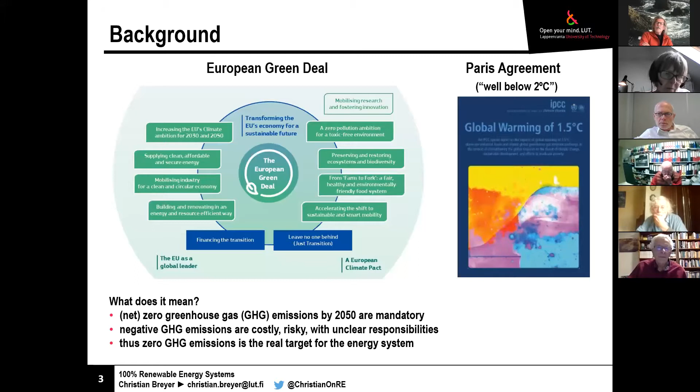So in the end, what we know is that even negative emissions will be required, but it's very blurry what it all means. And so the real first target is zero greenhouse gas emissions, and how this is achieved best is the question. You will not be surprised when I talk on 100% renewables that I rate this option very, very high. First of all, what is really important is we have a really fundamental rationale for electrification all around, and this means efficiency. Let's start with electricity, the first column.

If we have a thermal plant, whether it's fossil or nuclear, it doesn't matter. Around 40% efficiency is what we can expect from primary fuels in, electricity out. It can be less. We know nuclear is less. We know old coal is less. Most modern gas turbines are a bit higher, but anyway, there are huge losses. If we talk on renewable electricity from photovoltaics, wind turbines, or hydropower, then primary energy is electricity. So the electricity generated is primary energy. And then it's already on electrons, which typically is at very high efficiency.

Heat is something similar. If we have really good heating systems, we get close to 100%, maybe 80 to 90% is not a bad expectation value. But then compared to electricity-based heat pumps, where we can have a coefficient of performance of 3, 4, even higher would be possible. So that means we have again roughly a factor of 3 higher efficiency. The same is true for the transport sector.

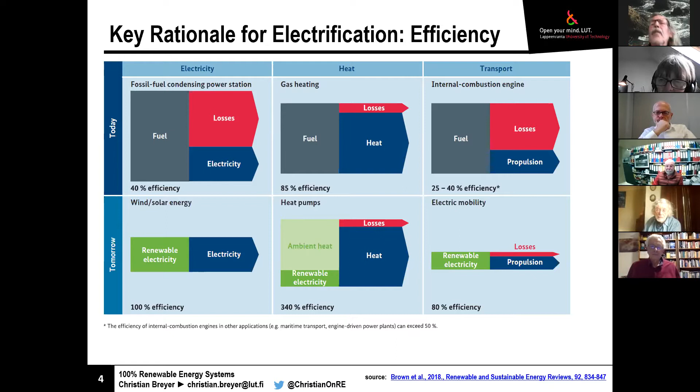So to my students, I always say our cars, at least in the recent past, are heating systems on wheels, because the efficiency for a car is around 20% over the entire value chain. So from an engineering point of view, a huge disappointment. In the best possible cases, maybe ships or airplanes, we're around 40%. But going back to cars, comparing that to battery electric vehicles, we will be at 70, 80%. So again, a factor of 3 in between. So to sum this up, electrification is the key means to get the entire energy system much more efficient. So now let's talk a bit more on Europe.

For the case of the UK, it might be more the other way around, more wind, but it really depends on the system constraints, whether we regard the UK more as an island or more as a basis for high national income from exporting energy. So valuable wind electricity exported to Europe, which could generate nice income for decades, then the wind share would be higher. If it's more for domestic supply, then the solar share would be a bit higher. But this is just a side comment here.

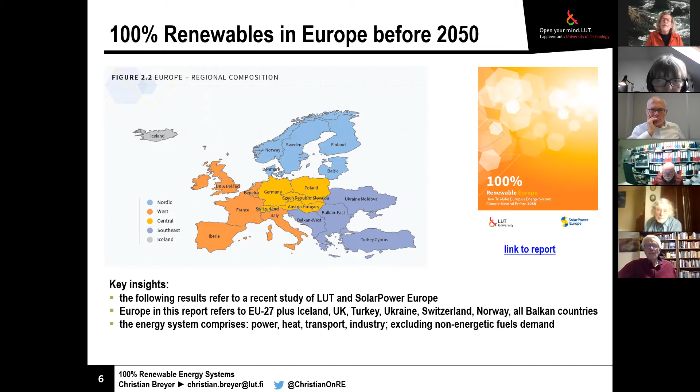When I talk about Europe, I mean this structure of Europe. So Turkey is part of Europe, Belarus you don't see here, that's then part of Eurasia, but Ukraine is Europe. The decision was simply which countries are more integrated to the European side or more to the Russian Eurasian side, and due to that you find this European structure, but that should not be that surprising.

I will take most of the fundamental storyline I would like to tell on a 100% renewable system from that report, because it's one of the highest standards we ever did. And this is now the basis for all research we do there. Three scenarios: one is called laggard, then moderate, then a true leadership scenario. 100% renewables is both for the moderate and the leadership. The laggard is more what was published so far from the European Commission, but then expanded for entire Europe.

And what does it mean for the Paris Agreement, greenhouse gas emissions, fossil fuels, nuclear? In the real leadership scenario the fossils are phased out by 2040, nuclear is phased out by 2040, all renewable, zero emissions. Moderate is a kind of societal compromise somewhere in between. When it comes to nuclear, there is a phase out, but the acknowledgement that existing plants run to the end of their technical life, but new ones would not be built. So this is the assumption there.

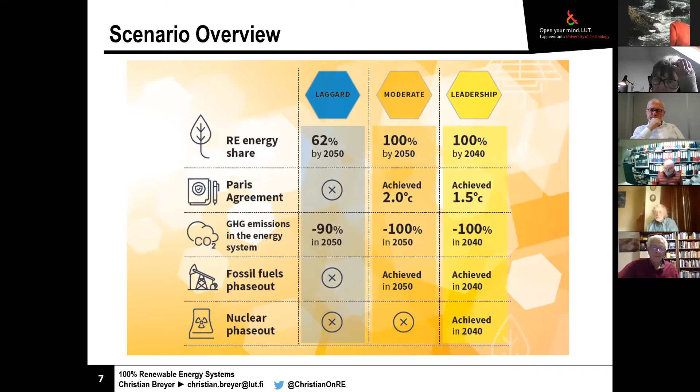When it comes to the energy system, sorry for this crowded diagram, but you see the tip of the iceberg of the complexity. All in all, we have 120 technologies there, for various sectors: power, heat, transport, industry, storage, power grid, and what we call power-to-X technologies, where electricity is converted to something else, like heat or fuels. A few of them are depicted. Of course also the conventional energy system from fossil, nuclear, bio and waste. So everything is there.

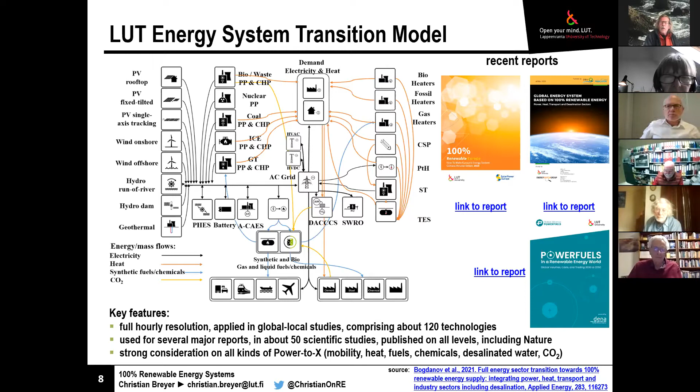This has now been used for a few dozen studies. Three major reports you see on the right-hand side. There is the one on Europe I talk about more, but we have also a global report and a report focusing on electricity-based fuels and chemicals, called here power fuels. A speciality of what we do is that power-to-X is really regarded in much depth, whether it's mobility, heat, fuels, chemicals, clean water, even CO2 capturing. So, now talking about the results.

First of all, the renewable energy share of primary energy, the right-hand diagram. Not surprising that the leadership scenario has 100% renewable in 2040. That was the definition of the scenario. Moderate then a bit later; it's not fully 100% renewable in 2050. The reason is that one or the other nuclear reactor is simply left. The laggard, you see, deserves its name.

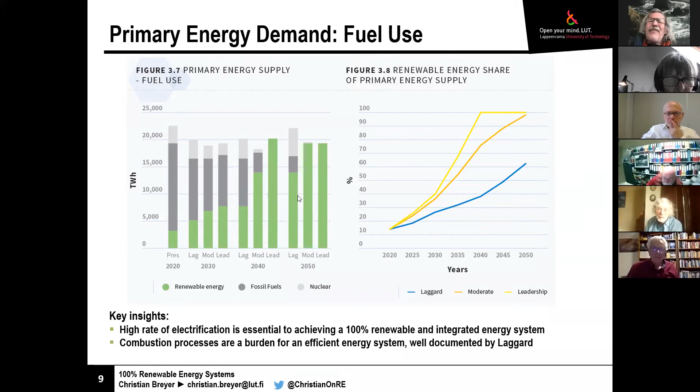When it comes to the fuels on the left-hand side, you see the abbreviations. The present starting value is 2020, or rather 2019, so before the pandemic. Then it's the laggard, the moderate, and the leadership with these time steps. And you see that the green part, renewable energy, just goes up step by step, depending on the scenario. Not so surprising here.

So now let's start with electricity generation. As said, this is an all-Europe perspective. In some parts of Europe it will be different, but I have a slide where we can see the regional variation across Europe. However, with this latest methodological basis, but also with the cost assumptions and technical constraints, we have been the first really showing that solar is most likely the leading source of energy for entire Europe.

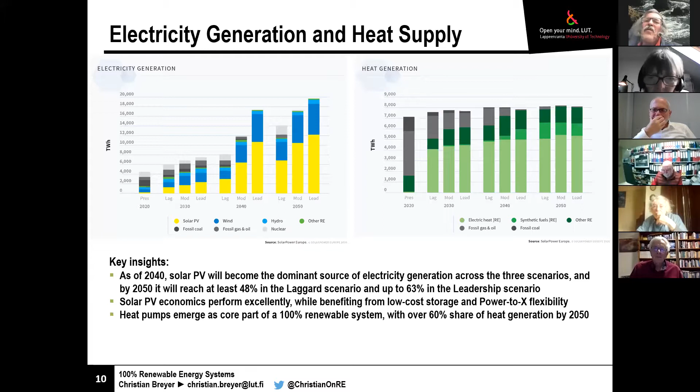For heat generation, I don't go into much detail here. You see in the end, it's a lot of renewable energy-based heat, and a lot of that is renewable electricity for heat pumps, or for higher temperature heat it is also possible with direct electric heating, synthetic fuels, and other renewables are also there. Could be geothermal energy, solar thermal, for instance. Of course, also some bioenergy.

When it comes to storage, of course, we need some storage, and I will tell you several stories about storage. You will see them also in the following slides. However, all in all, we need a lot of storage. When it comes to the output, so the discharge from storage, it's fully dominated by batteries. And the reason is they manage the day-night dispatch, in particular in a system with a lot of solar. So that means charging during daytime, discharging during nighttime.

But the same would be at least partly true with more wind. Wind is a rather unstable source. So solar is a bit more convenient for the system because it's available in daytime and not available in nighttime, and that's day by day, with seasonal variation, of course. With wind, there can be a week without wind or 2 weeks with full wind. So this is a bit more challenging from this variability, but both would work. That we know. It's then just a question of the system configuration.

Anyway, batteries are very important to balance that out. And as you can see from the discharge, this is mainly batteries. We see a bit of pumped hydro energy storage. This is, by the way, what we have today in Europe. It could be a bit of thermal energy storage, of course, where heat is required.

In a renewable system, we need a bit more gas storage. That was just not displayed here. Of course, we have today also gas storage because we have some seasonalities in gas supply. That is also required in future, but it might then be synthetic methane. It could be hydrogen. So both means gas here.

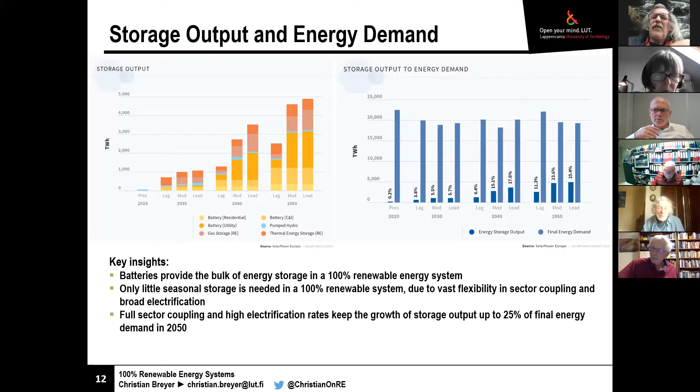When it comes to the overall coverage of the energy demand from storage, then you see we talk about a quarter roughly, mainly from heat and electricity. For fuels, we have not counted it for storage, so there will be not much difference from today. So when you have to fill the fuel in an airplane, it would not change much in future compared to today. The only difference is it's a synthetic fuel based on electricity.

Good. Now we come more to the details across Europe. So you see, all in all, and let's take this moderate scenario, more than 50% is solar for entire Europe, but still a very high substantial share of wind for entire Europe. But if we look into more details, then you see it's really different. So the Atlantic coast and the Nordic region are wind dominated.

So here you see a lot of wind, in entire Scandinavia and the Nordic region, the UK, but we have to be very careful. UK here means there is a lot of wind electricity export to Europe in this fully interconnected system. And by the way, in the summertime, there would be some substantial import of photovoltaic electricity from South and Central Europe to the UK. So this is the situation in a strongly interconnected, collaborating Europe.

If we have a kind of selfish, how to say, self-reliant Europe, where all national states do it on their own, then we would have in some countries more wind and in others more solar. So in the UK, it will be more solar. And there's a diagram later on that. But all in all, it's not surprising. The more we are south, the more there is solar. The more we are at the Atlantic coastline, the more there is wind.

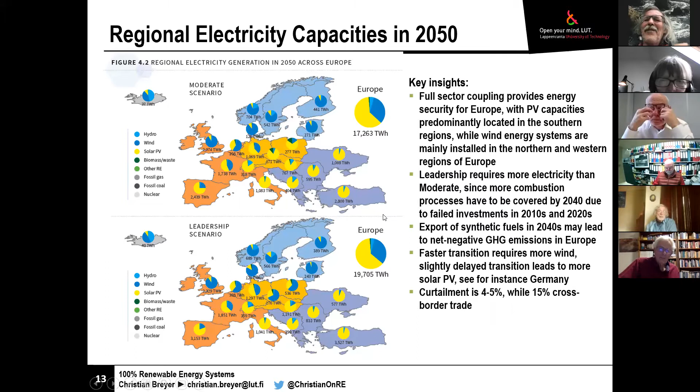Now, what is more important is here, because this tells us a lot of the hourly dispatch of such a system. Maybe I should have mentioned it earlier. When we always do such research, it's always in full hourly resolution. So every hour is respected based on historic weather data for the same time for all the resources, because it's important that for a specific weather year, we select that solar and wind is from that year, because what we typically know, if we have really good wind conditions, we have poor solar conditions and vice versa.

And you even partly see that in hydropower, for example. If there is a lot of wind, there is often a lot of rainfall, then you even see more hydropower. But anyway, so this is in a then more than 50% solar dominated system, you would see this huge daytime solar capacity available.

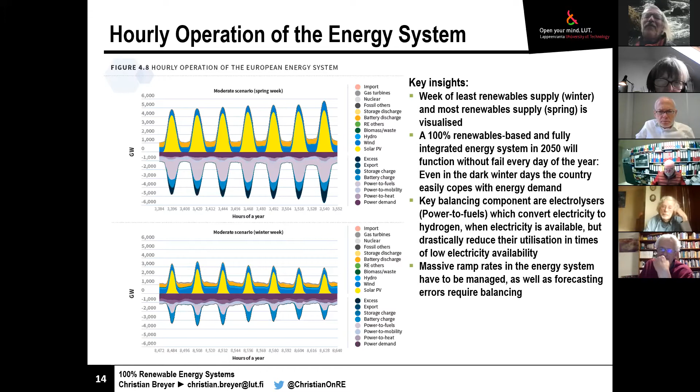You see also in the wintertime, there is a bit more of these colors. And this is, for example, power to heat. So there is more heat demand in wintertime. By the way, there's also a bit more electricity demand in wintertime. But what is most important, this is done in full hourly resolution so that we can capture all of these effects.

But how does it work here? We have renewable electricity. With electrolyzers, we get the hydrogen. The hydrogen we can use directly, but there are not so many applications in the end. If you do a detailed analysis, then it can be converted with carbon. Of course, sustainable carbon can be captured from air. Then we have synthetic methane that can be used directly, can be liquefied. Then we have LNG, for example, could be used as a fuel for ships, could be traded.

We can go for the so-called Fischer-Tropsch process. By the way, I just learned a few months ago, it was already fully established in the 1920s, also in the UK. Then it was commercialized in Germany at that time. But it's practically old technology. We know since 100 years how it works. The output is diesel, gasoline, jet fuel, naphtha, very valuable for chemical industry. We can go for methanol.

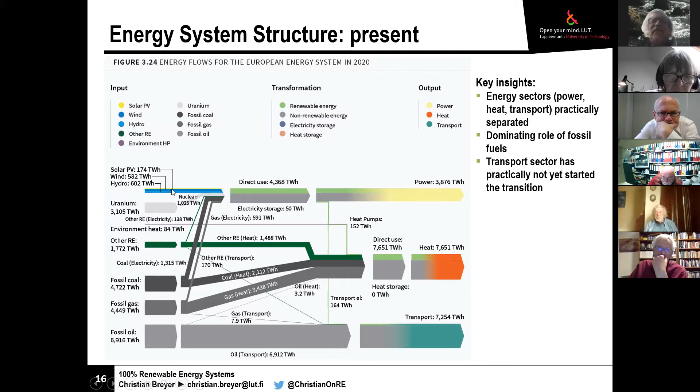So this is the old system design; how it would look like in a renewable system. First of all, energy sources are mainly solar and wind, some hydropower. The rest is not anymore there. Some sustainable bioenergy might be left. By the way, when I talk on sustainable bioenergy, it's only residuals, byproducts, and wastes, nothing else. Environmental heat, this is simply from heat pumps when electricity goes in and heat from the environment is taken.

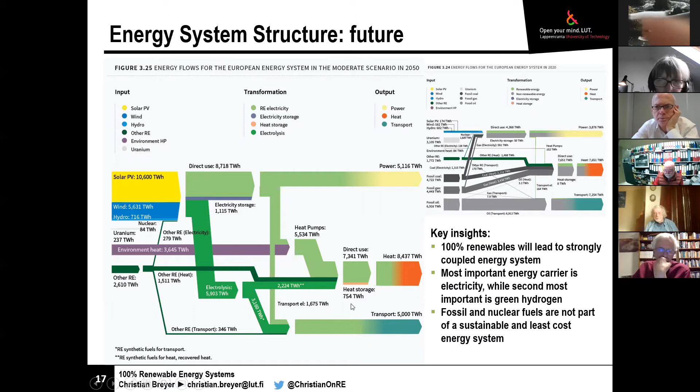But then you can see a lot of the electricity is used directly in the power sector. A lot of the electricity is used directly in the transport sector. These are our electric vehicles or trains, things like that. What cannot be directly electrified goes here with electrolyzers, maybe a further synthesis, and then we have indirect fuels for the transport sector. And heat has a bit of mix of everything.

I come closer to the end, but still I require one or the other slide, so maybe I can use maybe 5 minutes, a bit more.

Maybe someone is a bit loud, maybe someone could mute the microphone, then it will be a bit easier for all. Very sorry to break in there, but could everybody make sure they're muted, please? Because we're getting background noise. Okay, maybe now it works.

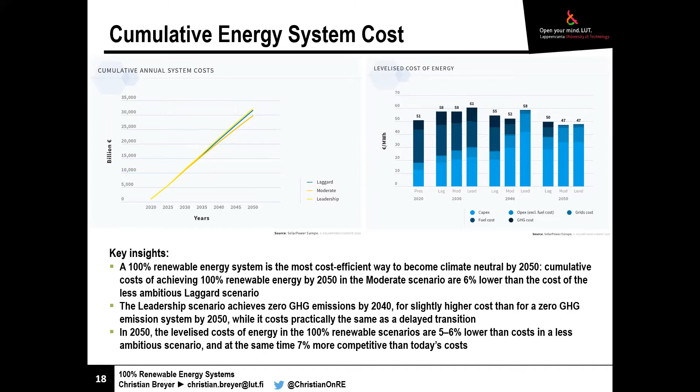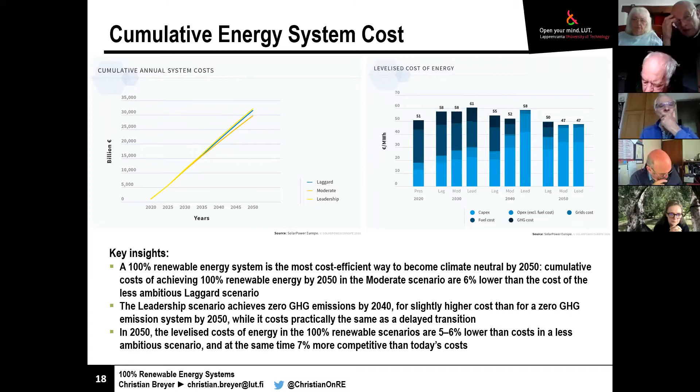Thanks a lot, David. Yeah, so from the pathway cost, they're very close. The moderate scenario is the least cost, but the leadership and the laggards are close. What we can see here from the cost is also that being super low ambitious, practically failing in climate policy, would cost the same as being super ambitious and having the job done in 20 years. I think that's maybe even the most important message. It will be a few percentage points lower in cost if we get it done by 2050. So taking all the risk of climate change, for me, the rationale here, the job has to be done by 2040.

I lived a few months in Bath and had visits in the entire region around. Of course, it was summertime, but it was great sunshine, and I enjoyed the palm trees in Cornwall, by the way. So anyway, there is sunshine.

That's the point, and there's in particular sunshine when wind is not good during summertime. So due to that, solar and wind in interaction will be important. But that's a question of exchange with Europe, but of course also with Ireland. But Ireland itself has also excellent wind conditions and some space for solar, so not too much exchange will be required.

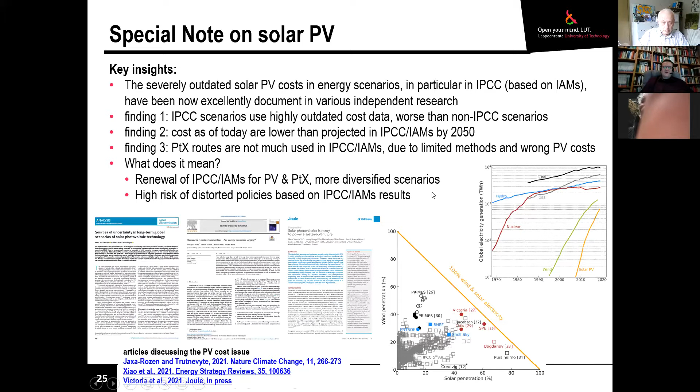Maybe I will not tell too much on PV, only the fundamental message: in major international research, in particular what is used for the IPCC, solar energy is downplayed by failures of those who did the scenarios. To cut it short, this year there have been 3 major articles published, all with the same fundamental insight. The integrated assessment models, mainly used for the IPCC, have no clue on solar energy. To cut it very short, the reason is wrong cost, wrong modeling. So, as we say in science, they require a renewal.

So that was then all. So just for the summary again, a low ambition pathway in Europe is a burden for society from both climate and economic perspective. This moderate scenario, so that means zero emissions by 2050, appears to be the most economic pathway. However, a highly ambitious climate change mitigation pathway is possible, which would result in more investments, but with the benefit of lower per unit energy cost in 2050 and slightly higher pathway cost.

So all in all, we should have a revised target by 2040, and there is already discussion now on that. Power to X is the central element of a future energy system. Solar PV, at least for entire Europe, even more global, is the prime source of energy, complemented by wind energy, which is the second most relevant one. In some regions in the world, in particular UK, wind will be in the lead, no doubt on that. And hydro and bio will support.

I have a bullet here. So the UK energy transition is comparable to all what happens in entire Europe, but wind will be different. And the 100% renewable energy system is a fast growing research field, serving the societal needs we really need.

And of course, I would like to say thanks to my entire team here, as you can see, from various countries around the world, with a lot of different native languages. They all talk on solar economy, but solar means the physical solar. So all what we get from the sun, which is wind, hydro, bio, and solar.